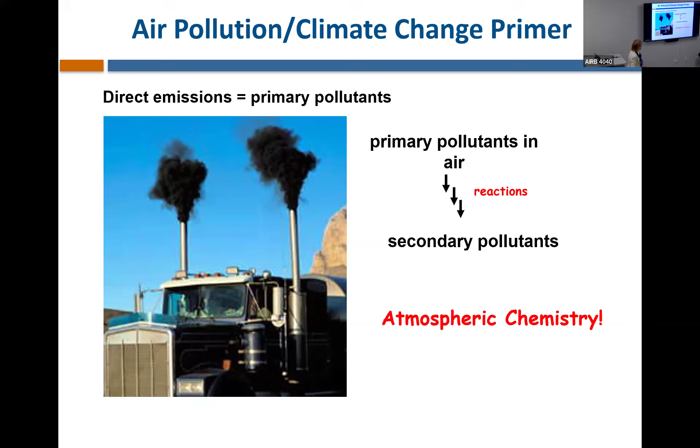If we didn't have these reactions in air, life would be a lot different in terms of air quality and air pollution. So the key ingredients are mainly, in California especially, volatile organic compounds, which I'll call VOCs. That's gasoline-type compounds.

It turns out biogenics are an important contributor too. Plants and trees—you go into a forest and get that nice smell, and that tells you there's a volatile organic compound. Citrus groves give you limonene. As soon as you smell that nice smell, you know they're putting out volatile organic compounds. It turns out most of them, almost all, are really highly reactive in air. So it took a while for us to appreciate that there are natural contributions.

The second part is oxides of nitrogen, which comes from fossil fuel combustion. Our idea in burning fossil fuels is you combust it with O2 to get CO2, which we thought was a really good idea for a long time, and out of that you get energy. But to burn it you need oxygen, which comes from air. So you've got nitrogen, 80%, and a much smaller amount of oxygen. You heat them up to a high enough temperature and you get oxides of nitrogen.

Most of what you get is nitric oxide (NO) and a little bit of nitrogen dioxide (NO2). But what happens in air is that this gets converted to nitrogen dioxide. This was a power plant plume in Provo, Utah at 7 o'clock on a Saturday morning—you can see this brown plume here, which tells you it's nitrogen dioxide.

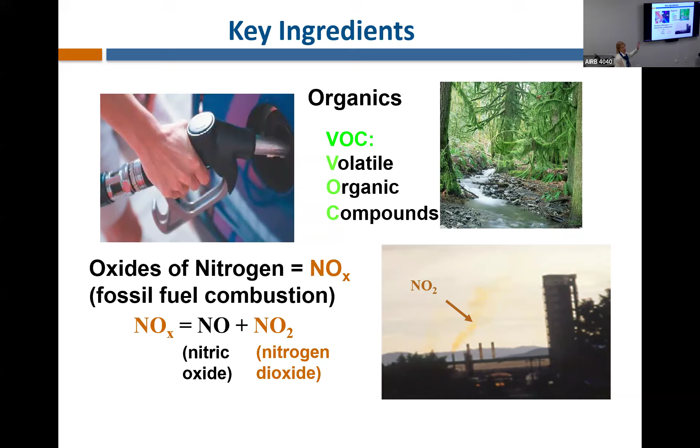We were on our way to Montana to fly fish, and I think at 7 a.m. on a Saturday morning they thought nobody would pay attention. When you see something that brown, it means they're putting out a lot of NO, and it's oxidizing very quickly to NO2. I can show you that.

This is a high concentration of nitric oxide I've got in here, and you can see for the most part it's colorless, except my acetone bath didn't work perfectly yesterday. So if I open this up—it's under vacuum—and convert the NO to NO2, you can see what happens very quickly. That's what was happening with the Provo, Utah plant.

One of the things is this color is great, right? If you think of our sunsets—NO2 and particles are largely why we get these gorgeous sunsets.

Many years ago, my husband and I—my late husband—were working on our first book. We were up in Washington State, and the big thing was to hike out to the most northwesterly tip of the continental US to see the sunset. It isn't so easy—it's on an Indian reservation with dirt roads, just two ruts, and you park and have about a mile to walk, tripping over vines with your flashlight. We went out there, sat and watched, and the sun just went down. We thought, well, it must have just been a bad day for sunsets. Then, after being there for months, we realized we're just used to these gorgeous sunsets in Southern California—and this is the only thing I can think of that's good about pollution.

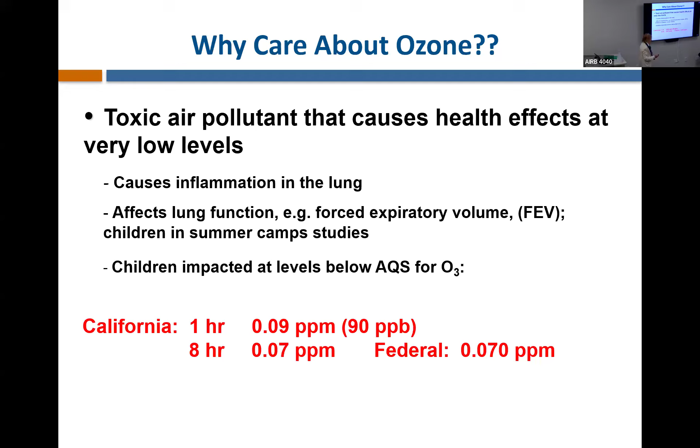And my late husband was a martini drinker. We were trying to figure out how to express to the public what a part per billion is. So we did a calculation: how many drops of vermouth would you have to add to a bathtub of gin in order to get a part per billion? And it turns out 1 drop of vermouth and 154 bathtubs of gin gives you a part per billion. So his comment was, 'That's a really dry martini.'

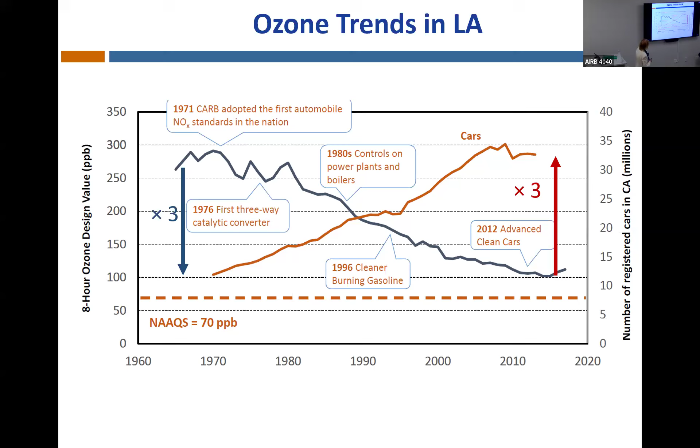So ozone, we've been doing really well in terms of air quality and improving air quality. California has been the leader, bar none. So ozone, for example, this is the 8-hour design value we're going after. This is ozone back about 1960, up about 300 parts per billion. You can see it's been coming down, and at the same time, the number of cars has gone up. So it's really a dramatic success story, that we've been improving air quality while vehicle emissions and our number of cars have been going up. And of course, it's because of all these things: catalytic converters, controls, cleaner burning gasoline, and so on. So ozone's gone down by a factor of 3, while vehicle miles have gone up by a factor of 3.

So now I'm going to focus a lot on particles. And it took us a long time, I think, to realize how dangerous particles really are. They really affect every part of the body. You'd expect that particles are going to affect lungs in a number of different ways, and associated with that, you kind of expect them to hit the heart. But it also causes changes in inflammation and reproductive health. Jun Wu does a lot of this work. And then central nervous system diseases. For example, it's been shown in animal studies that they will form plaques that look like the amyloid plaques in Alzheimer's. And there's just increasing evidence of association with things like autism, Alzheimer's, Parkinson's, and so on.

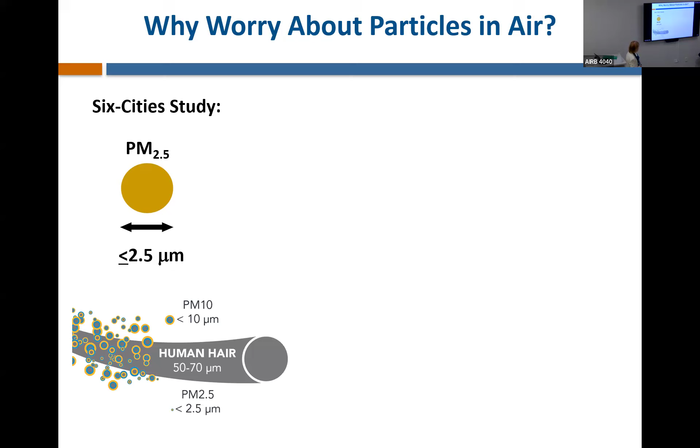This study really got people's attention. It was basically an epidemiology study. They took six cities around the US, from Portage, Wisconsin, which I can assure you is in the middle of nowhere—I've been there, don't ask me why—and Steubenville, Ohio, which had a smelter, and Topeka, Kansas, among these six cities.

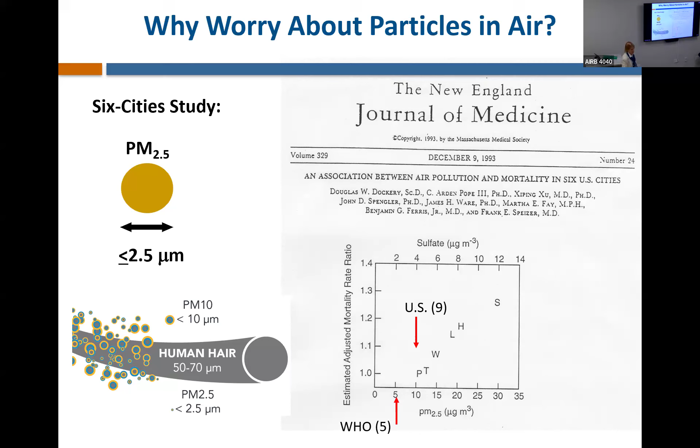The US standard is 9, and the World Health Organization is recommending a standard of 5 micrograms per cubic meter. So we're way off that, obviously.

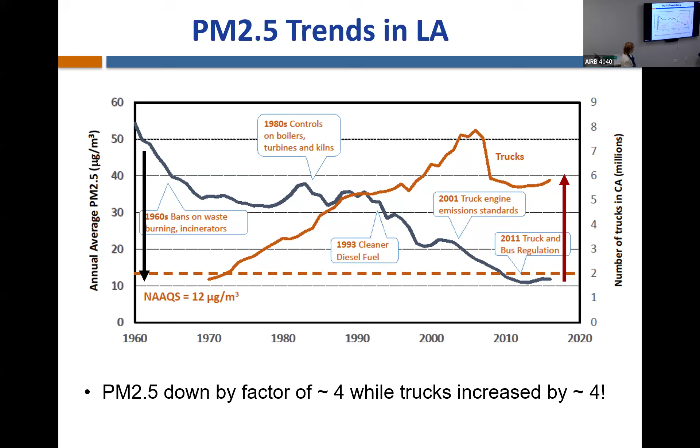It's really the same story as ozone. We've had a big increase in vehicle miles traveled by a lot of these sources, but with the controls put on—diesel fuel emission standards and so on—we've made a really big impact on PM 2.5.

So particles are bad from the point of view of health, but they're also the big thing in climate. And climate works both ways. When you have volcanic eruptions, it actually helps cool things off, in the upper atmosphere.

That's the whole basis of geoengineering. I take a dim view of this, but...

You have sunlight coming in and hitting the surface of the earth and putting infrared out, and the natural CO2 and water act as natural greenhouse gases. That means the average temperature historically, in recent memory, has been 60 degrees F instead of -2. Without these natural greenhouse gases, we'd all be living like we're in the Arctic. So we rely on these for a moderate climate.

But as soon as you add additional CO2 or ozone or other things that absorb the infrared, you start adding more heating. The particles have been the real challenge—we can calculate the effects of all these gases to a gnat's eyebrow, we know what they do in terms of contributing to warming. The particles are a much more challenging issue.

The reason is they scatter light out, and that depends on particle size. It depends on composition—it's not even just the average composition of a particle, but if you have a shell around the outside, it can affect it. So it's much more complicated than the gases.

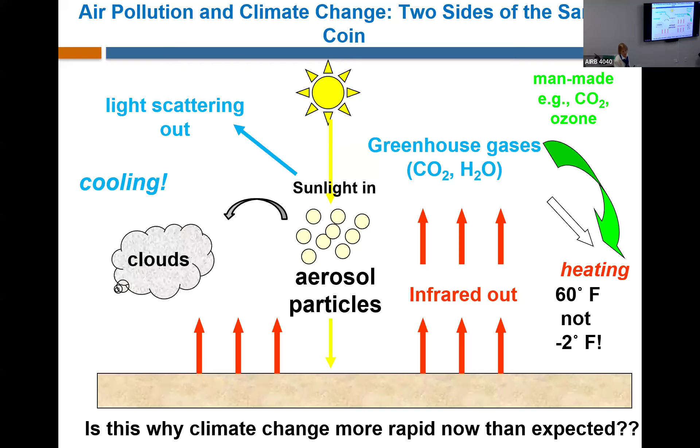But those particles cause all the health effects I talked about. Acid rain, right? Yes, acid rain. So you don't want to be breathing these things, but at the same time, they were kind of masking the warming that was really there all along. So as we've cleaned up sulfur in fuels, gone to low sulfur fuels and done other things to lower particle concentrations in air, now we're seeing the full effect of warming that was always there. So it's kind of a little sobering. And of course, all the problems.

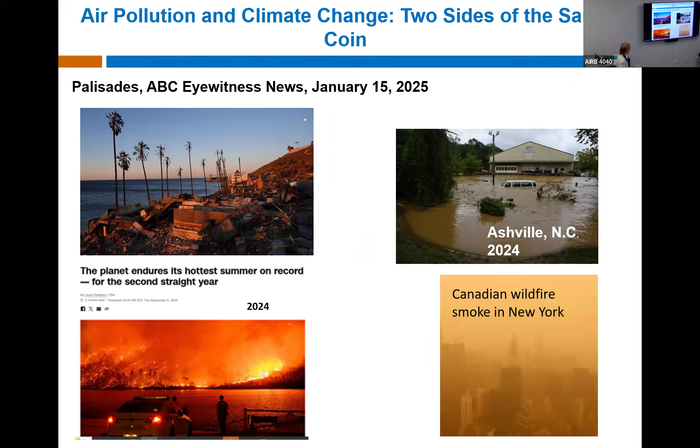So air pollution and climate change are really part and parcel of the same thing. And we know the effects - Palisades, fires and floods and the wildfire smoke.

So this gets us to this whole thing. Are EVs zero emission vehicles? And the answer is they are not. They are zero exhaust emission vehicles. So ZEEV, zero exhaust emission vehicles. But there are still emissions coming from these things. And they're coming from brakes and tires and resuspension of road dust, for example.

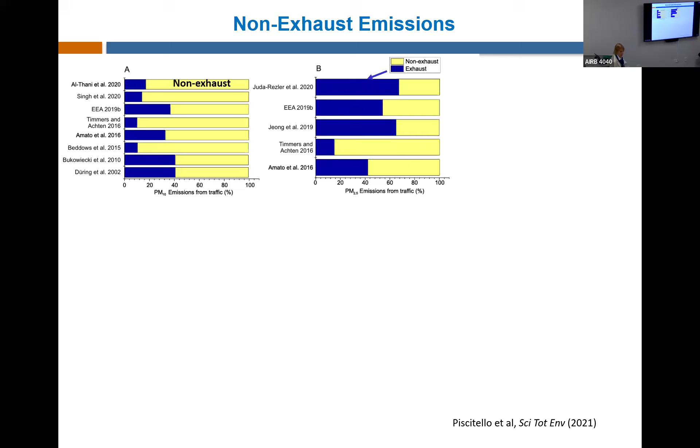So this was a review article where they gave PM10 and PM2.5 emissions. The yellow is the non-exhaust coming from brakes and tires, and probably not so much suspended road dust - that's usually bigger. And then these PM2.5. So you see the non-exhaust emissions are often larger than the tailpipe emissions because we've really been cranking down on the tailpipe. And then if you ask, how are these split? Looks like tires and brakes are about the same order of magnitude along with road particles, and then the resuspended dust is much higher, but this is in mass, and the resuspended dust are large particles, so got a lot of mass there.

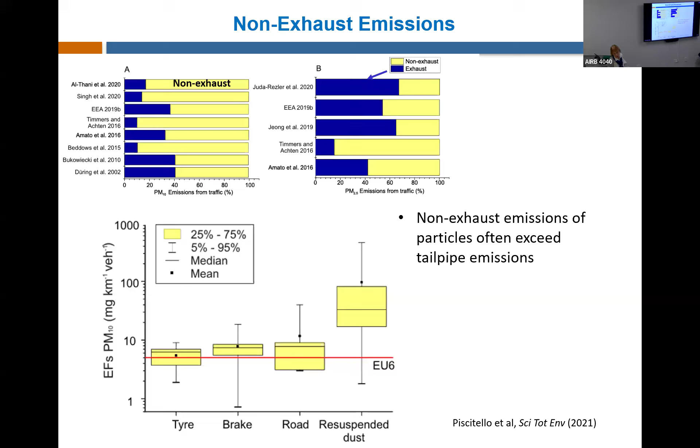In terms of what happens as a function of year, this is the percent of non-exhaust emissions contributing to the total, averaged over 28 EU countries, from 2000 up to about 2018. You can see PM2.5 and PM10 are both rising dramatically. And here's the 50% mark. So we have certainly passed the 50% mark now. It's a pre-Brexit slide - we're at 27.

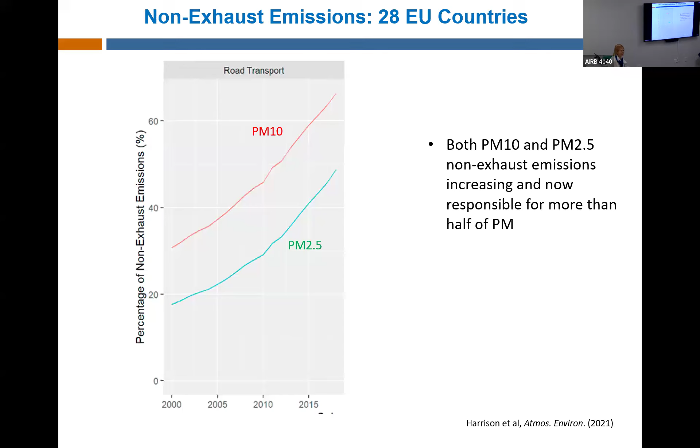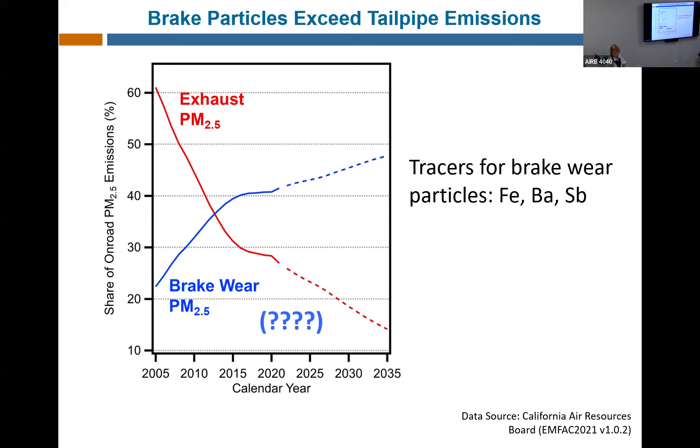So this is from the CARB EMFAC model. They're predicting that exhaust PM2.5 is doing this and brake wear is doing this. I put a question mark here because there were some studies they based this on, and I think they put too much weight on one that was sort of out of whack and higher. But the point is, anyway, that brake wear emissions are really important. So the kinds of metals you get associated with brakes are iron, barium, and antimony. Those have been chosen as markers of brake emissions. And I'll come back to this in a moment here.

So this whole issue of brakes and tires, people have been looking at this for a number of years, but it really grabbed everybody's attention when the Science paper came out in 2021. And this paper was like a CSI crime thing. I wasn't in this field at all and was on my exercise bike in the morning reading Science. Usually I'll just scan something that isn't in my own field, but I started reading this, and it was so good.

I had to keep going, even read the SI, right? And so it turns out this group in Washington State noticed that salmon in streams were dying. And the streams - the one commonality was the streams seemed to be close to roadways. And so then they said, okay, maybe there's something coming from traffic that's causing this. And so they did an enormous number of studies to track this down. And what they came up with is this compound that we call short form 6-PPD, that this was the culprit.

What's interesting is that this is added to tires as an antioxidant. So years ago in California, your tires, your windshield wipers, anything rubber would degrade before you actually wore them out, because of attack by ozone.

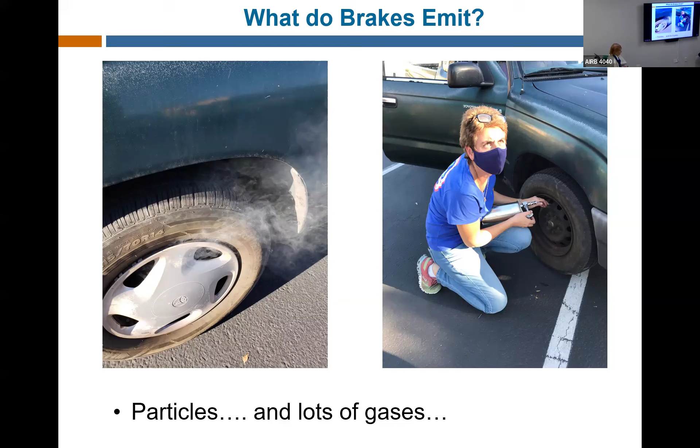And he said, I'll tell you what, let me roll around the Rowland Hall parking lot on a Friday afternoon when nobody's around, foot in the gas and foot in the brake, and see what happens. And we'll sample. This was his Toyota truck, where he did that. And this is Barbara Barletta and his group taking a sample. And it turns out there were a ton of gases coming out.

We couldn't believe it, and that really led us down a whole path for a couple of years. So then the question is, obviously burning his brake pads up is not characteristic of normal driving, hopefully. So we wanted to do things in a more controlled way in the lab. So the question is how to do it.

I have to say I was really naive. I talked to some of our friends over here in engineering who are part of AirUCI. And when I wrote the proposal, I said, well, we're going to need a dynamometer. And they said, sure, we got a dynamometer. So, okay, I wrote it in. And then when push came to shove, it turns out there's dynamometers, and then there's dynamometers.

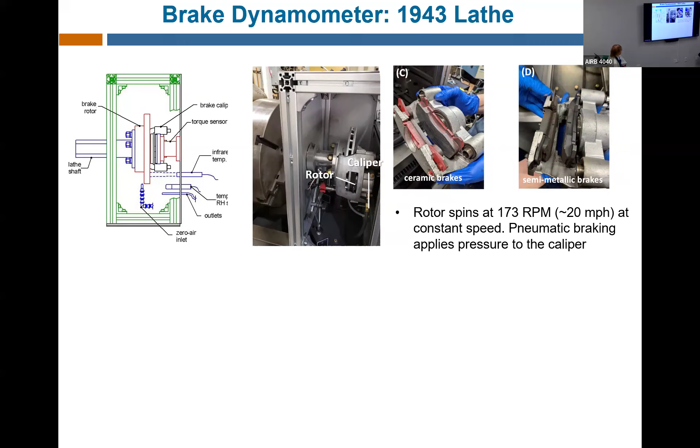So we did that, and then we've got a million different measurements we can make. For particles, we can measure the size distribution, the charges, chemical composition, a whole bunch of offline mass spectrometry. For gases, we've got all kinds of mass spectrometry here that we can use, and then these canisters that Don Blake's group does. So this is a canister with Simone and his group sampling.

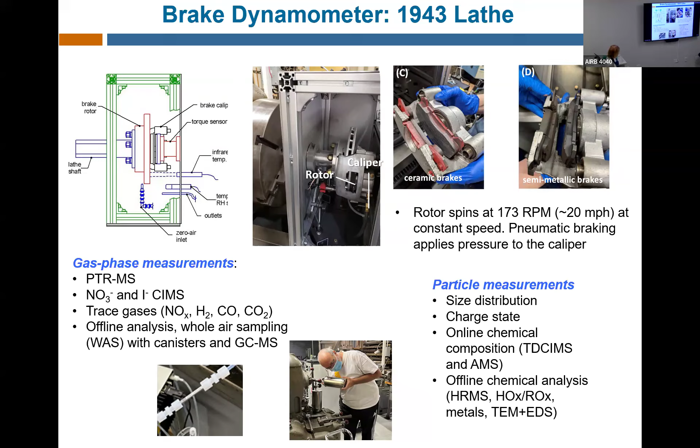So what did we see when we first did it? Well, it turns out you see a lot. So we did light braking first. This is spinning, so we didn't have the brake pads engaged, but the rotor was turning. And it turns out, we're going to go back and look at this because we suspect that there's actually something there. And if that's the case, then that's going to be happening all the time you're driving and may turn out to be the most important part of this.

But we were in the machine shop, lots of machine oils and so on. We had a whole thing enclosed in a box that we flushed, but we're very cautious about whether we might have had some contamination from the machine shop.

Because brake pads used to have asbestos. Yes, so these were semi-metallic and then non-asbestos organic. Yeah, it went away when we switched from rear driving cars to front driving cars. I'm not sure, are there any asbestos-based brake pads anymore? I don't think so, maybe for vintage cars, but otherwise we're not supposed to. Yeah, for good reason.

So if you start braking, the temperature starts to rise. This is the rotor temperature, and it's going up here to somewhere around 100 degrees. Then if you really stomp on it, it goes up further and gets up to 200. We've actually gotten up over 300 at times, and other people have reported that in the literature as well.

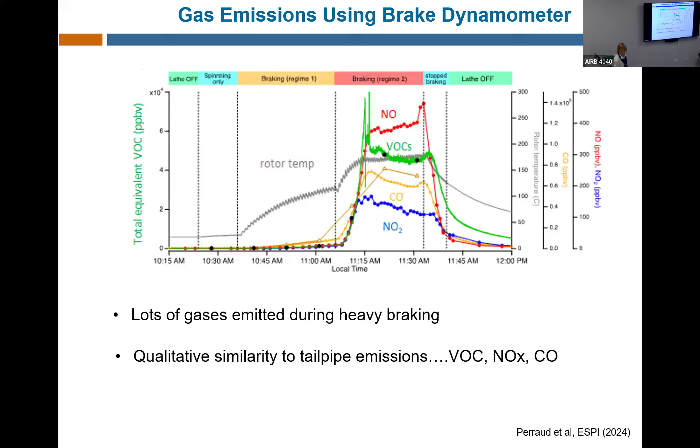So then particles - these are what our European colleagues call banana plots. This is the diameter of the particles in nanometers as a function of time. So this is light braking. This is heavy braking, mislabeled here - so this is heavy braking, and the colors represent the number of particles. Red is more particles.

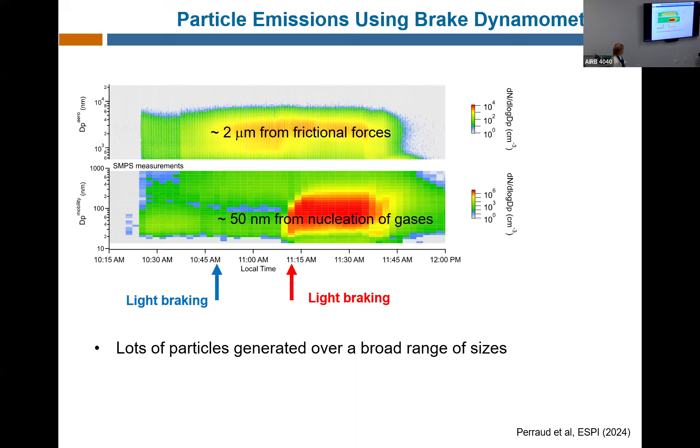So what you see is that with light braking, you form some particles here, but this is 1,000 nanometers - this is a micron. So in the light braking regime, you're forming particles that are roughly 2 microns in diameter from frictional forces. And then in this regime, this is 100 nanometers, and about 50 nanometers is the mode here. So in the heavy braking, you're forming much smaller particles. We think that's because you're volatilizing things from the brake pad, and they're actually reacting and nucleating to form new particles. So it's very much like what we see in air - lots of particles generated over a broad range of sizes.

So the brake pad composition - you've got friction material, underlayer adhesive, and so on. It's very interesting: Bertha Benz, the wife of the founder of Mercedes-Benz, was the one who first invented the brake pad. And they're ceramic brake pads, the non-asbestos organic type. So they don't have that much in the way of metals, but they've got fibers and rubber, carbon compounds, glass, fiberglass, and so on, bonded with resin.

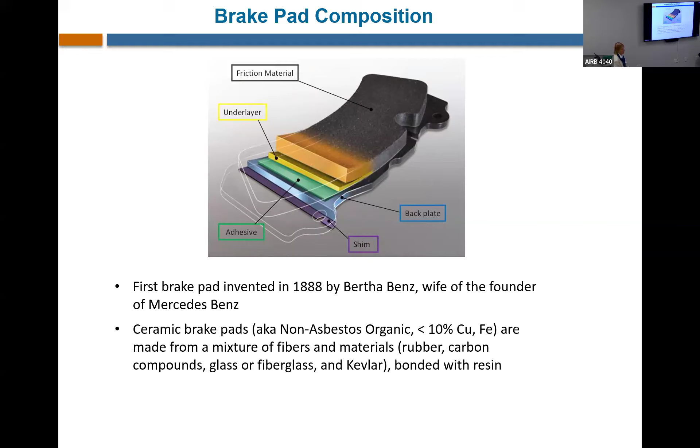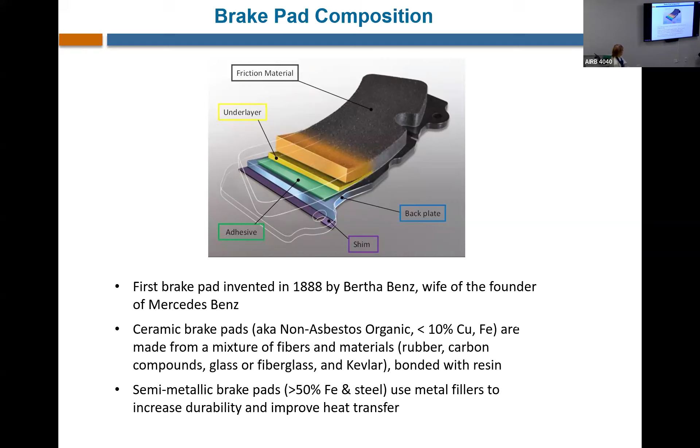So there's a lot of commonality in the composition of these and some tires, which makes it a little challenging to differentiate them. And then semi-metallic brake pads have a lot of metal components, iron and steel and so on, along with metal fillers. So we took - this is my Subaru, a 2001 or 2002 - because it would have more tailpipe emissions that we could look for.

So we tried looking at the tailpipe emissions from this using this proton transfer mass spec. It's an online technique, very sensitive. And what we saw here mainly were these BTEX - benzene, toluene, ethylbenzenes, and xylene - what you hear about with water pollution.

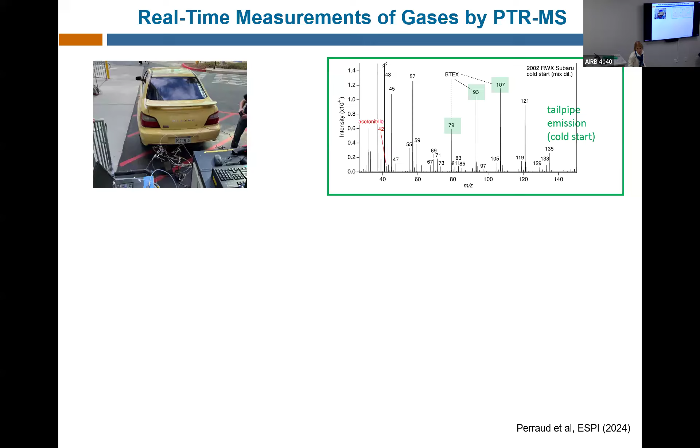That's because there's a phenol resin holding everything together, and when it decomposes, it forms phenol. You also see acetonitrile here, and I think this is going to be a big marker for brake emissions, but trying to measure it in air turns out to be very tricky.

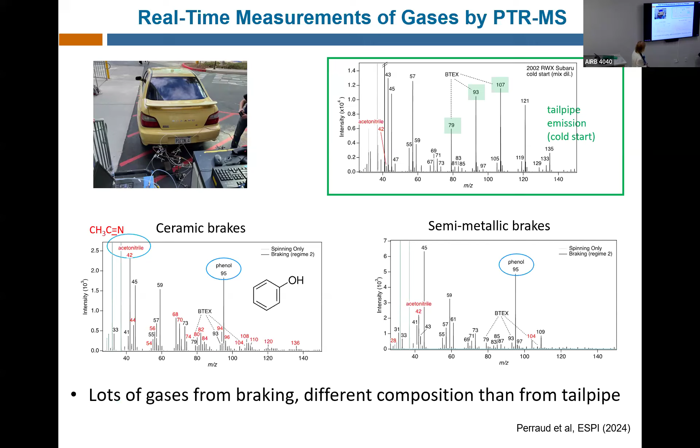These are the semi-metallic brakes, and again phenol is a major component coming from it. So lots of gases from braking, and they're different from the tailpipe emissions per se.

This is a list of all the ceramic brake VOC emissions, compared to biomass burning. I won't bore you with all these chemical structures, but anything that ends in -ene has a carbon-carbon double bond, and that's highly reactive. Limonene actually has two double bonds: isobutene, propene, isoprene, methacrolein, ethene, butene. You go down the list, and all these things are really highly reactive.

This is a sample, an average from a whole bunch of wildfires, biomass burning, that came from this paper, Liu et al. So we connected the same compounds: limonene is number 1 here, it's number 3 here; propene is number 1 here, it's number 3 here.

But you can see there's a lot of commonality in the kinds of things emitted from braking compared to biomass burning. So we really kind of think you can think of brakes as like a slow-burning wildfire in a sense, in terms of what it puts out.

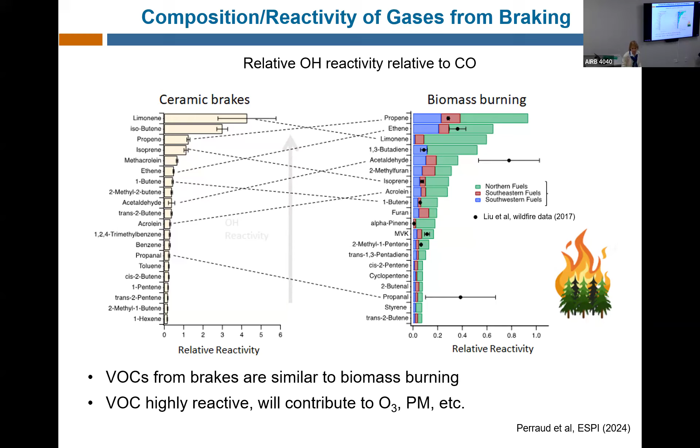Clearly these are highly reactive, and they're going to contribute to ozone and particle formation, just like tailpipe emissions have. One of the things that was interesting: nitrous acid drives the chemistry of the atmosphere largely, and we don't know where it comes from.

I've spent a large part of my career on this, and I wish I could tell you I believed I knew where it came from. We don't. It starts with NO2, and you can look at all kinds of NO2 reactions, and they do it, but it's slow.

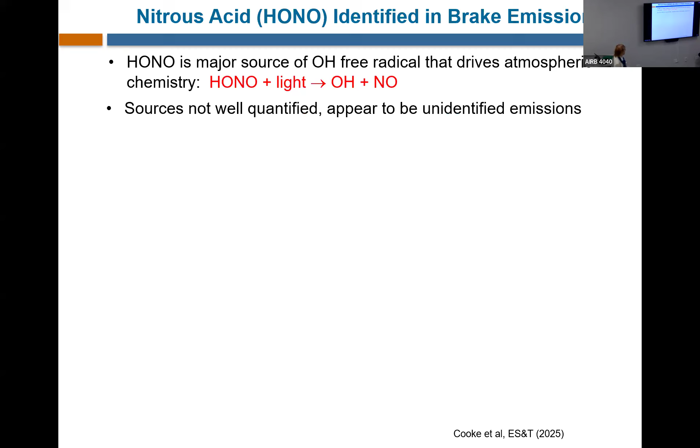One thing that's interesting is it turns out the particles that come out have an electrical charge on them. Jim Smith did these studies where he took these particles—some are positive, some are negatively charged—and put them into a particle counter.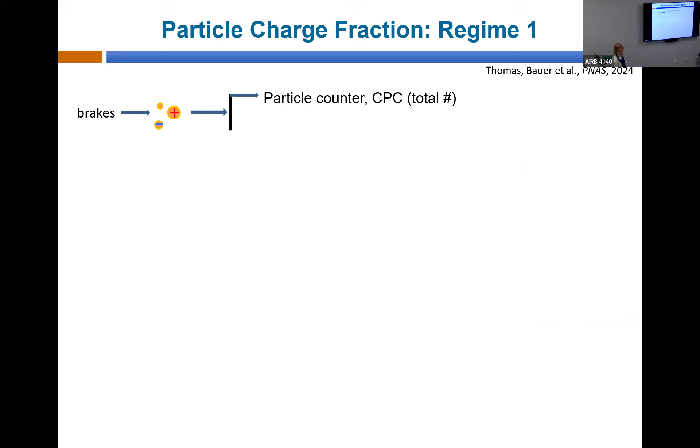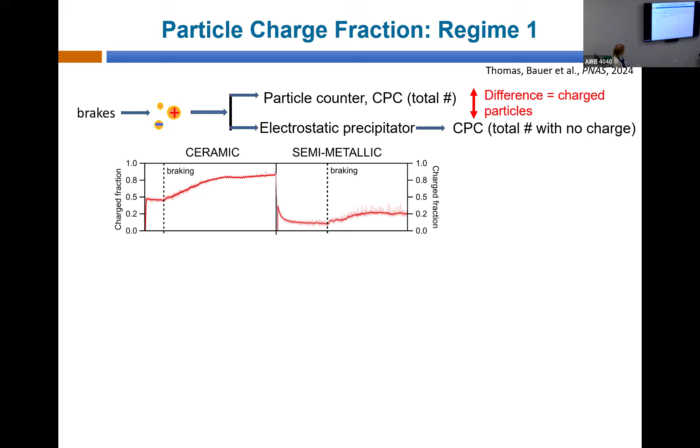The counter just counts all the particles, doesn't care about charge. Then he put a little electrostatic precipitator in to take out any charged particles and counted them again. The difference gives you the number of charged particles. For ceramic brakes, we were getting up to about 80% of the particles were charged; for semi-metallic, it was about 20%.

It's interesting because when you think about how to control emissions, the tailpipe we thought was hard, but in a sense it was easy because it's like one point source, like a power plant. But with brakes and tires, you've got the wheel well, and it's just not obvious how you're going to capture things from there. If they're charged, you can imagine putting a little electrostatic precipitator in the wheel well and capturing a lot of these.

One of the postdocs working on this said, 'Got a better idea—let's put a charge on the whole car, and that'll be a theft preventative too.'

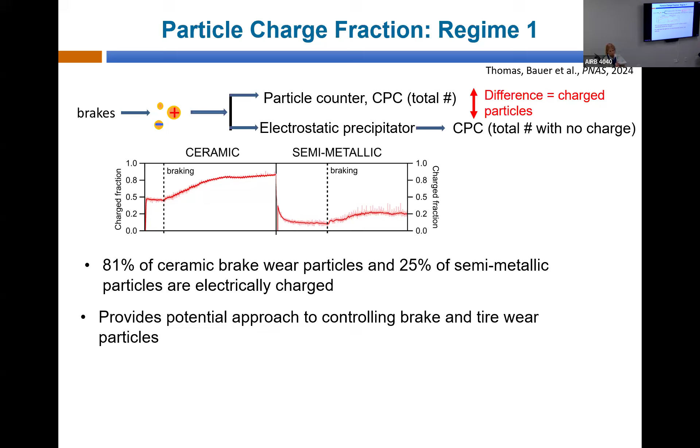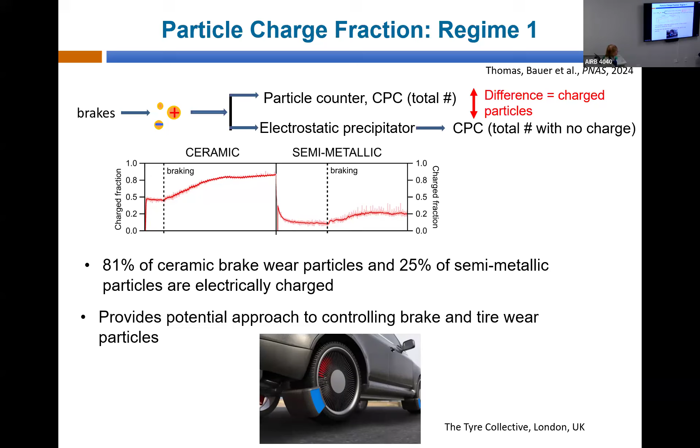Oh dear, so there is actually a company in London that's proposing to do this. This is one of their things, and they've kind of gone silent over the last year, so we're not sure what's going on. When they presented data a couple of years ago at a conference, it was collecting significant amounts, but not 100% or anything close to 100%.

So these are whole air sampling, these are the canisters Don does. And so we've done an exhaustive analysis of the kinds of organics that are in there.

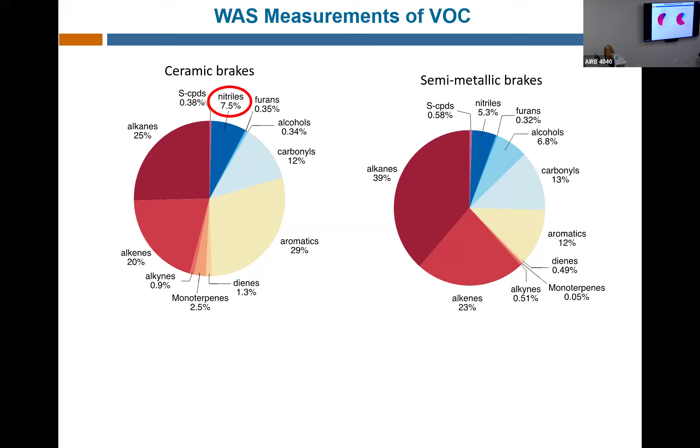One of the things we found is that nitrogen-containing compounds are significant components, and we're thinking that this may help us for trying to get a tracer. So these are just some of the nitrogen-containing compounds we've identified in brake wear particles. It's just an amazing group, and acetonitrile, as I said, is one that we'd really like to go after, but apparently it's hard to do by GC.

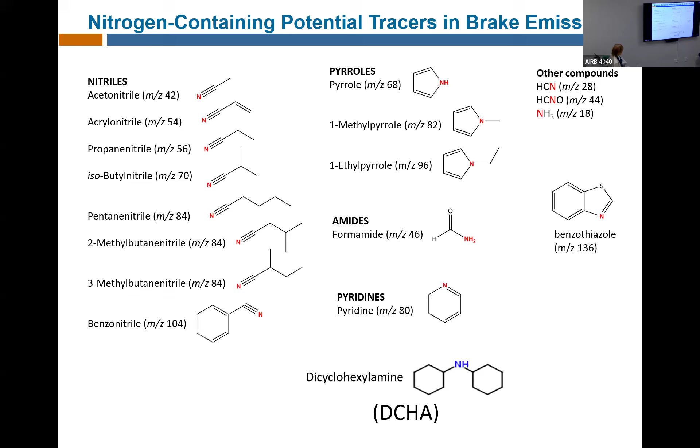So this molecule I'm going to talk a little bit more about. This is dicyclohexylamine, so there's a nitrogen there. And so we thought that would be a really good brake marker.

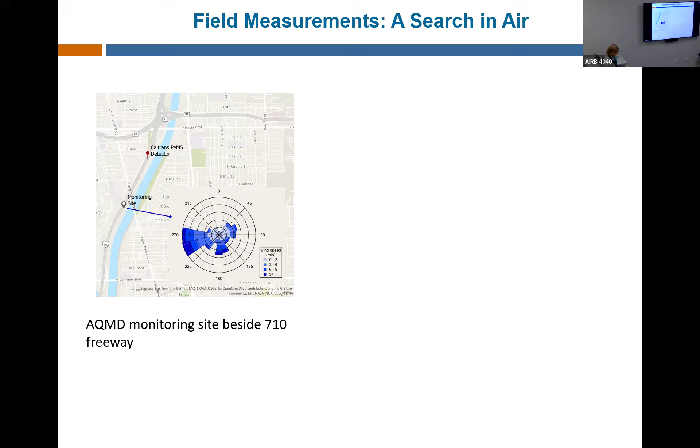So we have done some field studies. Now I have to tell you, this is not my forte, and I realize how complicated field studies are. But AQMD let us set up right beside the 710 freeway, and the wind rose was such that the air was coming mainly from the 710 freeway.

How far from the ports? So it would be on that stretch of 710 coming down from 91, probably halfway, something like that. So a lot of truck traffic. Yeah, so mainly truck traffic, really.

It decreases as you go away, goes from like 20 to 5 or less percent from the ports. But it's heavy truck traffic.

And then we went to the Santa Ana Zoo, and so it turns out actually it's funny, the fellow who we were put in touch with who arranged this, his name was Mr. Hawk. That's a joke, right? It was.

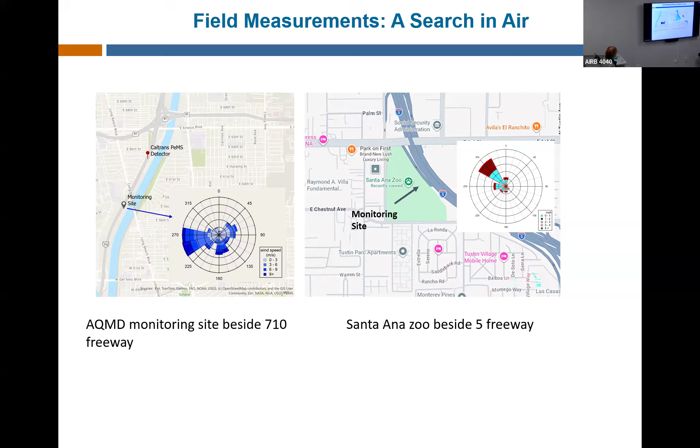Anyway, so we were monitoring here, and the wind was basically coming down the freeway. So what we did there is it was really nice. The sound wall of the zoo has some openings like this from when they built it, so we can just put our sampling tube through the wall right onto the off ramp. It's hard to see here, but it's sticking right through. I really thought Caltrans would see this and come and ask, but they didn't.

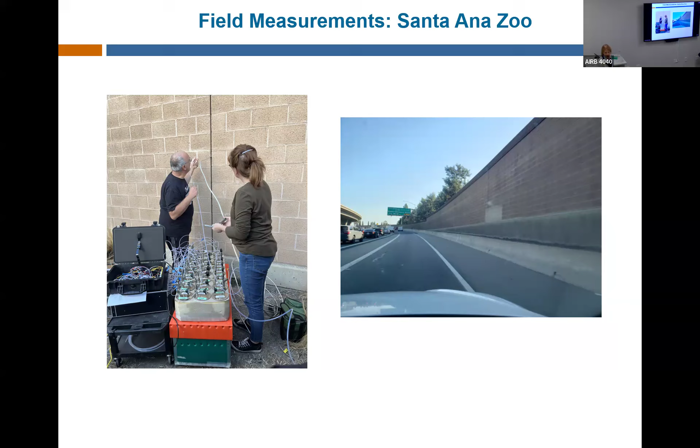We were okay. And then this was the 710 site, and the freeway is right behind it, it's right on top of the freeway. So we did some monitoring there, and we've got Caltrans data on speeds and so on.

So this is very preliminary, very. But there are loop detectors in the pavement, and depending on where your sampling station is, you can get real-time information about what's happening to the traffic. And that, I think that's what the students did, they pulled that off the Caltrans website that uses that.

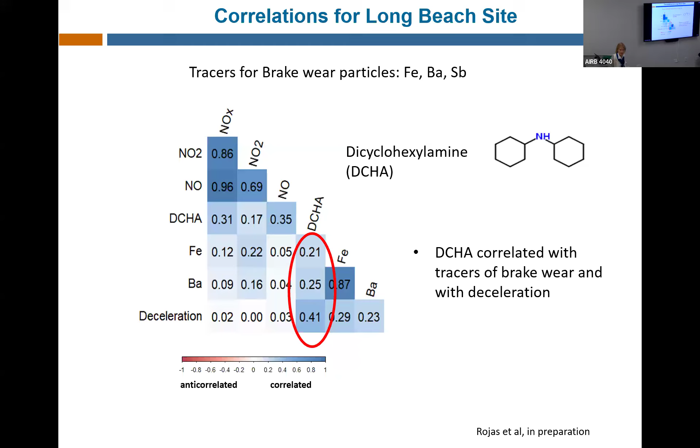So for Long Beach, the student has asked: we have tracers for brake wear that have been reported—iron, barium, and antimony. So she's done correlations between all the things we've measured and what she's estimating for deceleration. For iron, you see it has a really high correlation coefficient with barium, which makes sense from what we know of brake wear particles. The DCHA here is somewhat correlated with iron and barium, and also with deceleration. Being a lab person, I normally like to see higher correlations, but these are field studies.

So EVs are zero exhaust emission vehicles, not zero emission vehicles. They emit gases similar to those from wildfires—like a continuous slow burning wildfire. The particles are electrically charged, which gives us some handle to try to collect them before they end up in air. There's a lot of discussion and controversy about the factors that affect emissions from EVs—the idea that EVs are better because of regenerative braking.

Because everything we were measuring was from conventional vehicles, I'm not so sure, because I've seen in the literature people claim just the weight of EVs—I mentioned this for the tires, but not for the brake pads. There's no friction brakes because it's magnetic, right? They don't use physical friction—you try to apply little of it because it dissipates the energy, turning it into heat. You want to recharge the battery instead.

So the period you have to replace your brake pad is way longer than a normal internal combustion vehicle. So it'd be less of a problem? I drove someone else's car down the mountain with 150,000 miles on it. She said, I never changed the brake pads. I was like, oh my God—thank you for telling me now. That was one of the original Priuses with regenerative braking—it lasts longer.

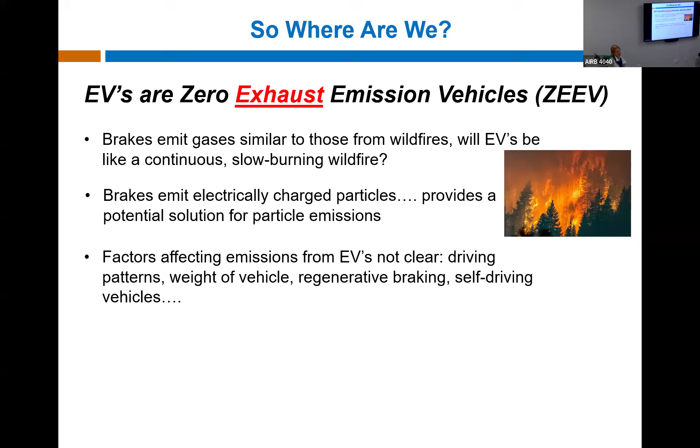Probably not. But it's true that tires are a big problem, as we were discussing at the beginning. But I would argue—I don't know, for sure, you would know—that regenerative braking for EVs is a big help. I'm sure it's a big help, but I doubt it's going to make it zero. No, it's not going to be zero. At some point you're actually braking, you hope, with brake pads.

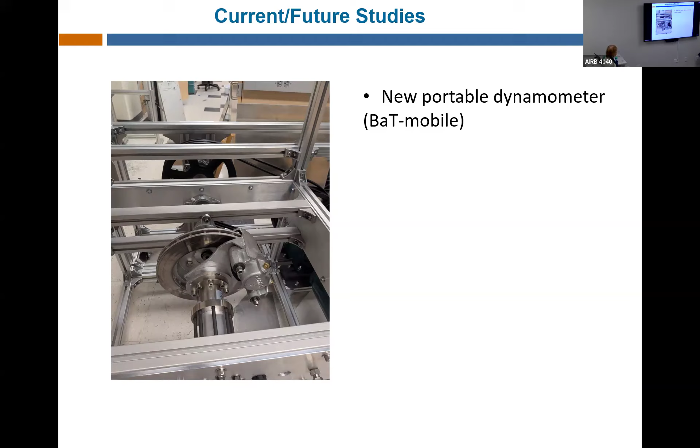So because we were using this lathe in the machine shop, there was a problem with machine oils and that sort of thing to worry about. The machinist wants to sell it and get rid of it, so he keeps asking when we're leaving. So Jim has designed a new portable dynamometer. The idea is, in the first round with Volkswagen, we had 13 faculty involved, including people from the Air Pollution Health Effects Lab. They were looking at the toxicity of the particles, and wanted to have the particles generated and go directly into their exposure chambers rather than collecting and extracting them. So this is portable, and Jim calls it the Batmobile—brakes and tires, mobile.

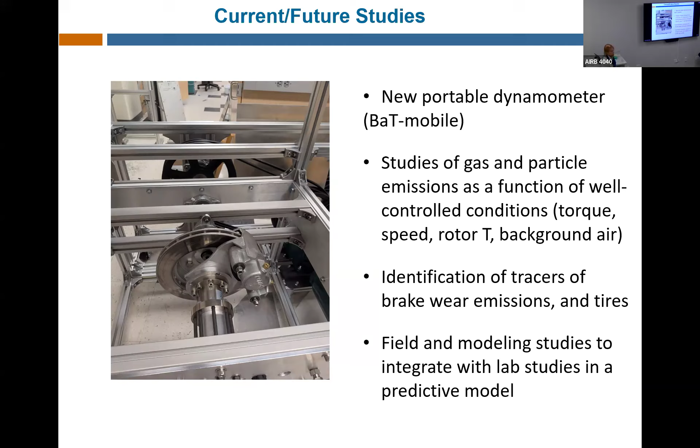What we really need to do is go back and look at gas and particle emissions as a function of well-controlled conditions, which we didn't have as much control over as we would have liked the first time. We want to make sure we identify tracers we can pick up in field studies, do the field and modeling studies to integrate the whole thing together, and assess how much of an issue this really is.

With that, these are the folks that were involved in this Volkswagen funding. It was wonderful, because it's really hard to get money to do everything from the chemistry and physical sciences to the health effects and social sciences.

You have two anthropologists there. I know, exactly—what are they doing? I mean, I love them and I know Kim, yes, but what is she doing on the project?

This proposal had to do with vehicles and environmental justice, which was not a dirty word at that point. So they were partnering with Madison Park Neighborhood Association. We partnered with them, and the Madison Park folks gave us entrees to the zoo people and monitoring sites and so on. Then we put on a summer program for their students. Kim and Mike were a really important part of that.

John was looking at trucks and whether we could pick out from satellite data trucks. Presented that work here, or a student did it, I think. And then Mike and Ricky and Andrea, of course, are APHEL, and then these are the folks in chemistry.

So the wonderful thing with this money is we could really do all this, and now we're back into being segmented. We can get our money for chemistry, but they have to get their own from another source for health effects, and Kim and Mike have. Why is that? I don't understand.